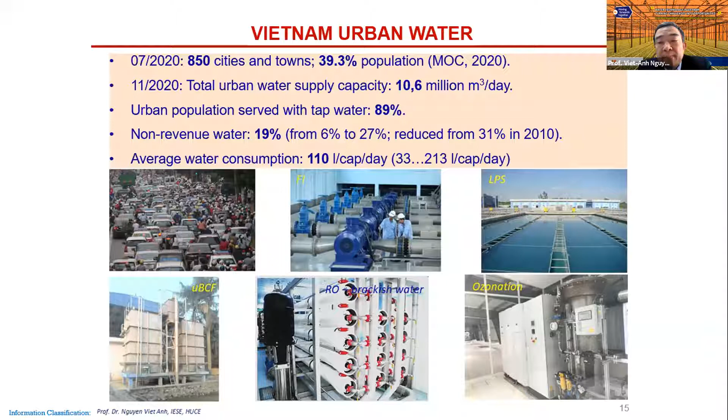Talking about wastewater in urban areas, so far we could treat only 15% of wastewater generated. But the number of wastewater treatment plants is still growing, and there are different technologies applied, including different types of activated sludge, oxidation ditch, SBR, trickling filter, and waste stabilization ponds.

Over the last 5 years, the investment for urban wastewater alone is already more than $1 billion US. So in coming years, we might need about 8 to 10 billion US dollars to treat all wastewater generated from urban areas, and we need from 3 to 6 billion US dollars to have 100% of urban water supply.

But please pay attention that the number of cities is growing, so we need more and more efforts, and not only from the state budget or loans. We encourage the private sector to take part, especially in water projects.

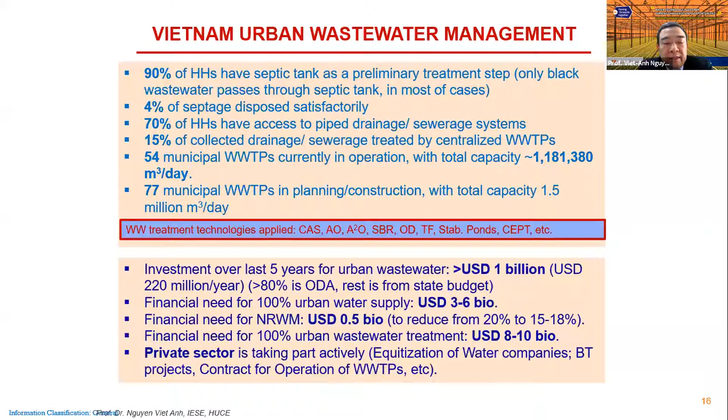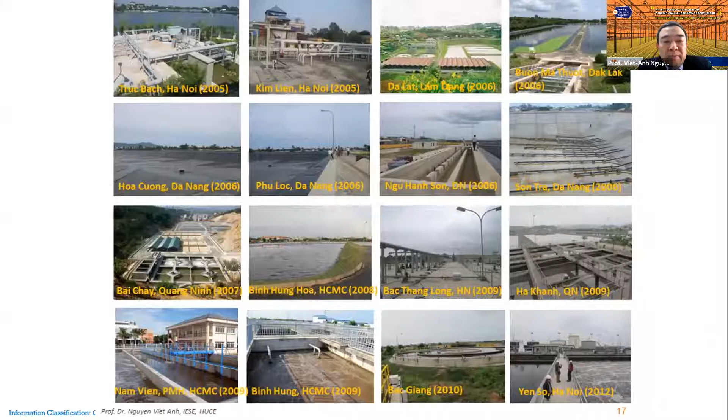This and the next slide, I just would like to show the in-operation water and wastewater treatment plants in urban areas with different technologies.

Now, about industrial wastewater management. We have more than 300 industrial parks, with an average occupation ratio of 73%. By law, all industrial parks should have centralized wastewater treatment plants, and so far 80% of these treatment plants meet the effluent standard.

The others are still under upgrading. They have to improve their technologies, even moving from class B to class A of the effluent standard. So we have a lot of room for business in providing technologies and equipment and so on.

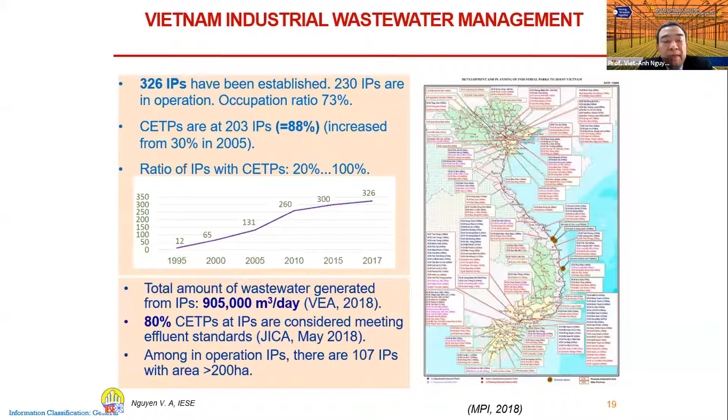So for each river basin, we start to develop the effluent standard accordingly. The government is now encouraging development of eco-industrial parks with industrial symbiosis. I know the Netherlands is very strong in this, so I hope we could find chances for cooperation. There's also a compulsory automatic monitoring station for the effluent of industrial and urban wastewater treatment plants with a capacity more than 1,000 cubic meters per day, which should transmit real-time effluent data to the authorities.

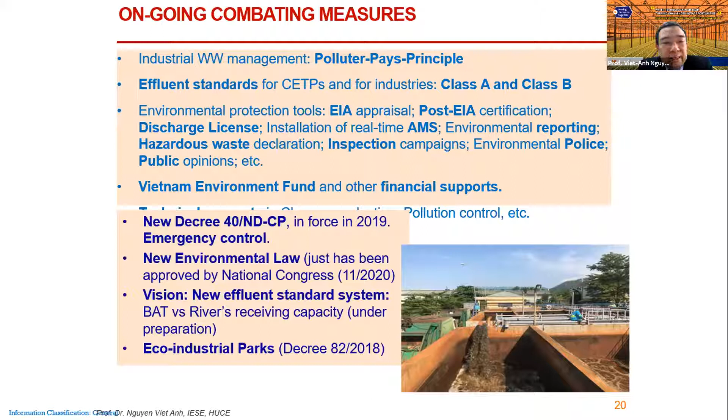So smart water solutions are now being highlighted in many water companies, and it will be a focus in the coming 5 to 10 years in the Vietnam water sector.

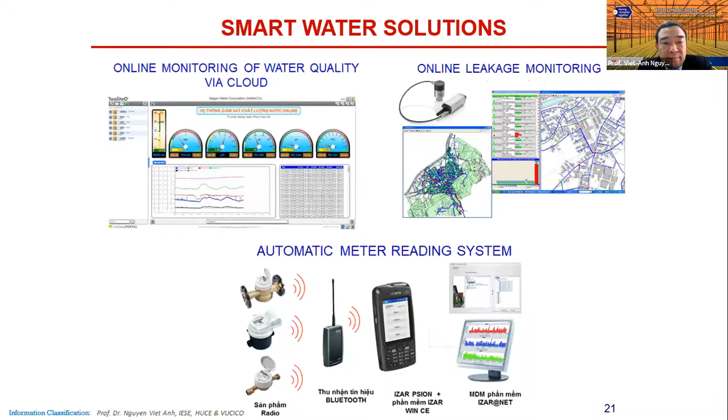Solutions for process control and optimization to save energy, to have less sludge produced, etc. And emergency control solutions—for example, we now have a new decree forcing blacklisted industries to have an effluent pond to make sure fish stay alive in the ponds before wastewater can be discharged to the receiving bodies.

And other options are also under development, so emergency control for wastewater and other pollution sources is a very interesting topic for cooperation.

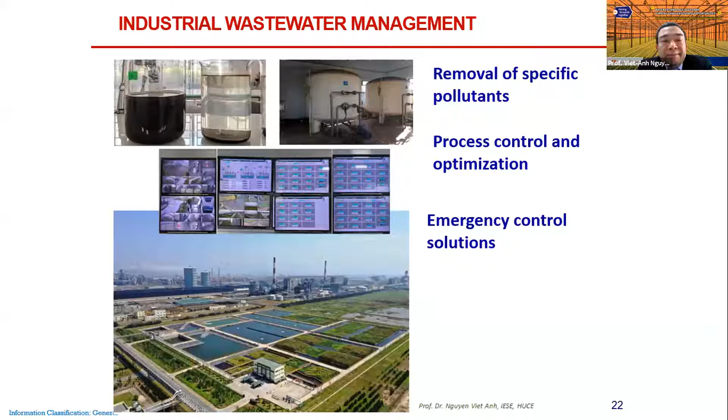But more than 20 cities in Vietnam already are developing smart city plans. So integrated waste management with resource recovery solutions is one of the important components of smart city development. These are some examples of our studies, and this is also a very interesting topic for Dutch companies to work in.

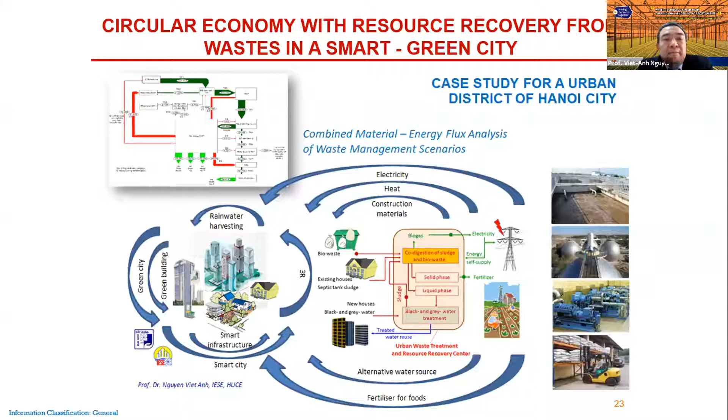So SUDS is one of the interesting topics. Next, please.

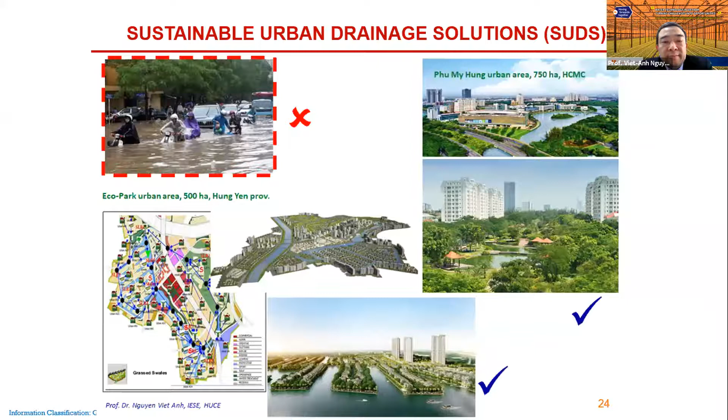Here I would like to highlight some opportunities for the water sector business. Private sector participation is encouraged; this is a policy of the government. So investors are welcome, and we have growing needs, increasing demand, and emerging challenges.

There are potential opportunities in the market: in water supply, solutions for non-revenue water management, smart water concepts and solutions, and specific technologies to remove specific organics, nitrogen, manganese, salt, and other substances. For wastewater, also specific technologies for specific pollutant removal with efficient performance, like energy and chemical saving, and footprint saving.

And we are starting to talk about resource recovery, especially from solid waste, sludge, and wastewater reuse. Industrial parks with eco solutions are also a good opportunity, and green and smart cities with concrete solutions like rainwater and flood prevention. Very important: smart technologies, with very high demand from planning through to the solutions.

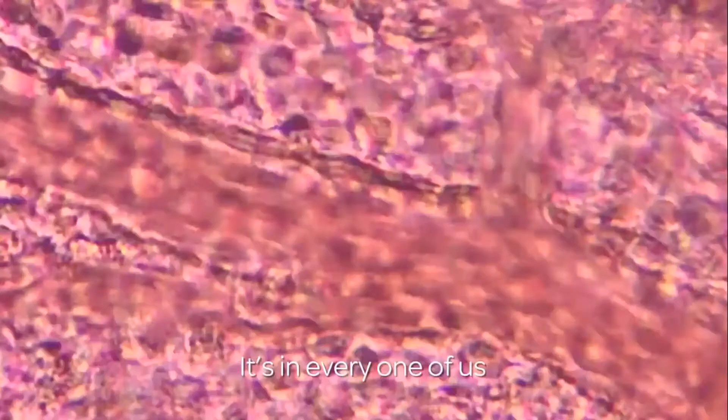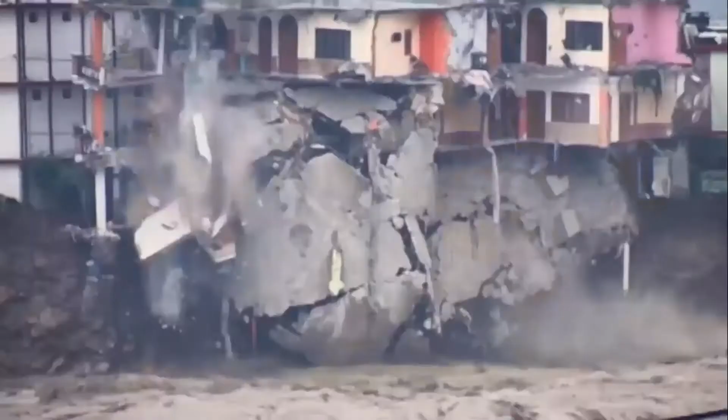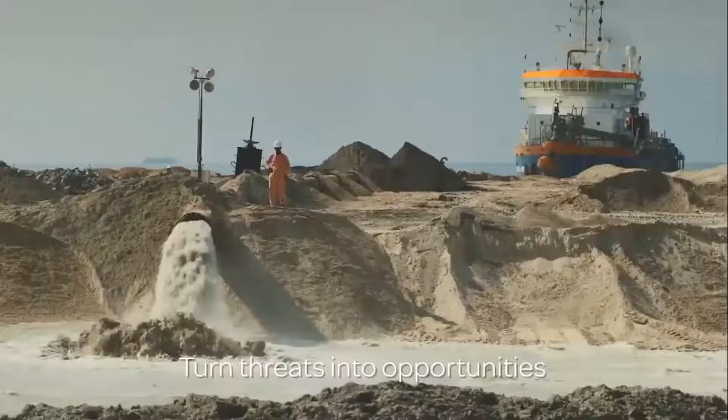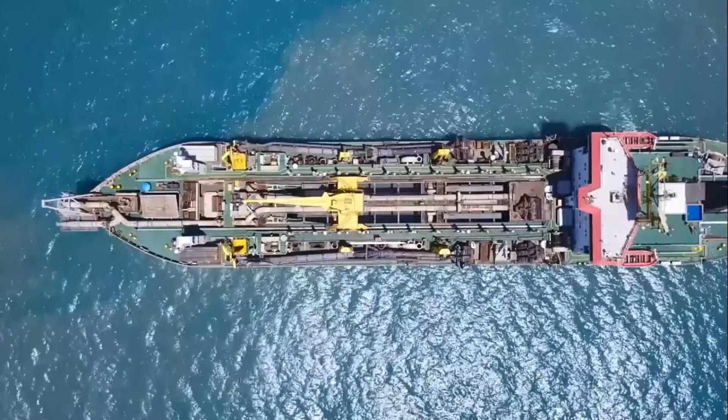Water. It's in every one of us, as a source of life, a connector of worlds. Water calls for a sustainable future, a delicate balance between humanity's progress and natural resources. We need to invest in transformative, integrated and inclusive solutions, turn threats into opportunities, translate research and market insights into breakthrough innovations, to build a prosperous future, to ensure there is a tomorrow for the planet, for its inhabitants, for present and future generations. We are the Netherlands Water Partnership, a network of Dutch water organisations working together on innovative and future-proof solutions for local, national and global water issues.

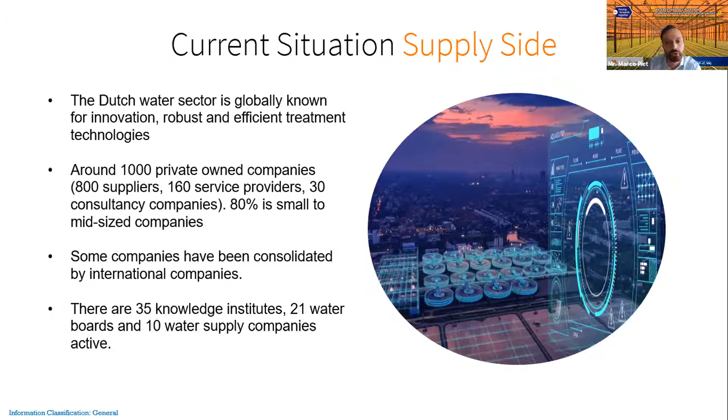The largest share of the companies are these 1,000 privately owned companies that are active, of which 80% are small to medium enterprises, basically up to 50 employees, and which are thus also the main target group of this study. Next slide.

The drinking water companies want to use the value in the source water and gain also energy and raw materials. This also to prepare for the energy transition and play into a more circular economy.

The wastewater sector in the Netherlands consists of several water boards, which are responsible for the cleaning of the municipal wastewater. The main focus of the wastewater field is the recovery and reuse of valuable components from the waste stream, higher effluent quality, less environmental impact, and reduced costs.

An increase of computerized control is used to increase the performance of wastewater treatment plants and reduce the labor that's needed for daily operations. So basically, we are looking at smart combinations, recovery of valuable materials and energy, smart water, membrane techniques, reducing footprint, land, chemicals, CO2, which also results in a lower TOTEX, total cost of ownership. Next slide.

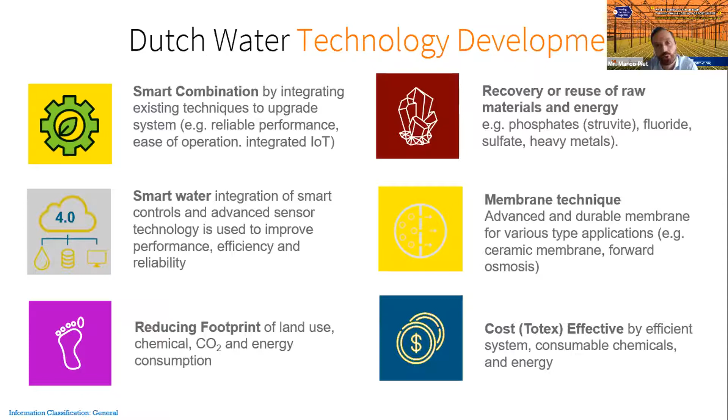So we compared the potential supply in the Netherlands, which of course provides a wide range of solutions offered by many small and medium enterprises, and the current demand of Vietnam.

And basically the demand as explained by the previous speaker, and as a result from our study. At the same time, we had to take into account the potential barriers, like different culture, the challenging business climate, also for instance, skepticism towards Dutch technology, whether it would work in the Vietnamese environment.

So this is an overview. In this overview, I will share the preliminary matches that we found for the different challenges. It's a bit a lot of text, small letters, but...

Per challenge, as you can see on the left, we categorized potential solutions into basically data collection and monitoring, analyzing data, and providing smart decision support systems, basically the software, and separate treatment solutions, the hardware. As many systems can be used in the water supply and wastewater sector, we did not make a separate classification for them here. Looking at the main challenges for Vietnam, and basically the challenges on the left are in random order and not by importance, we have put some examples for solutions in this overview.

Of course, there are a lot more solutions available, and a lot more will be included in the final report. The goal basically is to pinpoint: if you have a certain request or question or challenge, you can look at each of the sectors and find your brand name or solution.

As an example, for monitoring the water quality, predicting and controlling, the MPC buoy controls basically algae blooms in large lakes and reservoirs.

It monitors the water quality in real time and uses the data to predict and control algae blooms by making use of ultrasound to control the algae. As was mentioned, saline intrusion is becoming more and more a problem in Vietnam. Main solutions consist of membrane techniques, like Ceramac, which combines ceramic membrane units into one vessel, providing a more cost-effective and compact method to remove dissolved components from the water stream. Combined with SIX, which stands for suspended ion exchange process, designed to remove dissolved organic carbon from the water and help improve membrane filtration performance. It prevents membrane fouling. Another major challenge is the increase of pollution in the environment and water.

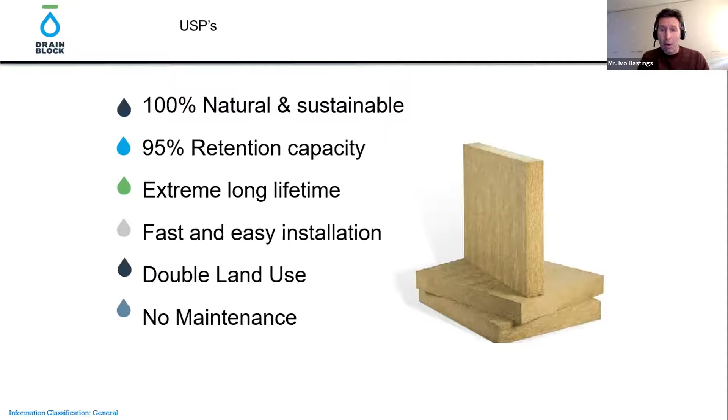Well, how about all the sediments, I hear you think? Yes, that's correct. Sediments are the enemy of the system. So before we take polluted waters to our reservoir, we will always first install a filtration step. Polluted water comes in, we filter out the sediments, and only the clean water will go to the reservoir.

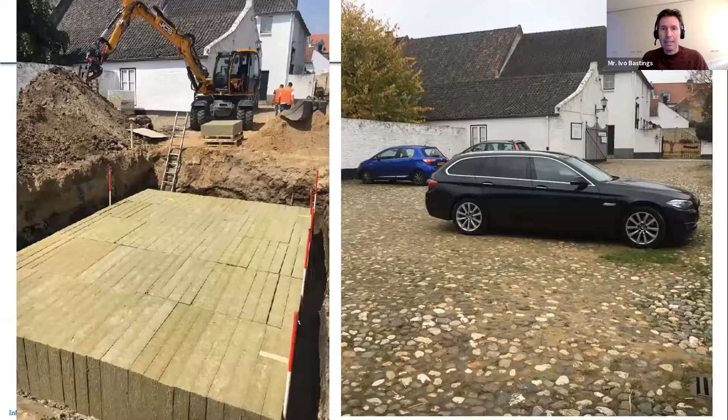This is a typical project, a typical situation in the Netherlands. What you see on the right picture is just a parking area. But the water from the roof and from the parking areas enters into the gutter, and underneath the parking area there is your reservoir, a drain block reservoir. From there, the water can only infiltrate into the soil. There's no more stormwater drainage system needed here.

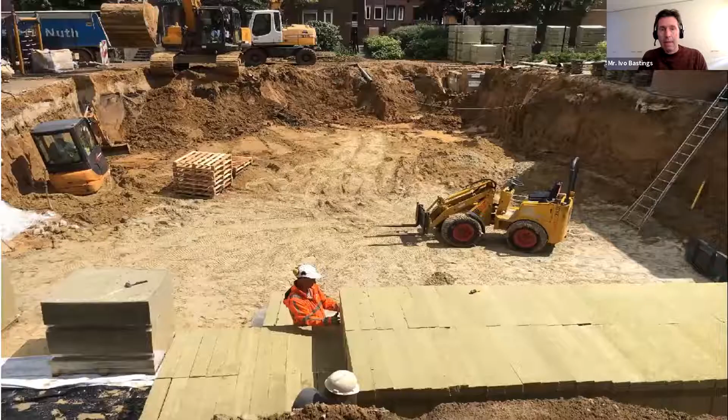This is a significantly bigger reservoir, almost 1,000 cube. But the client in that project did not allow for water infiltration. So on the bottom left, you see a black liner. This reservoir has been constructed with a complete liner surrounding it, and all the water is retained within the reservoir. That means the water in the reservoir is freely available for water reuse, watering your garden, or using for agriculture or any other purposes.

Well, this is a very interesting project. I show some of the great capabilities that DrainBlock provides. You see a slope road. Previously, when it started raining, all the water ran down to the lowest point on the road, and there was a flood. DrainBlock, however, has the ability to hold water against gravity.

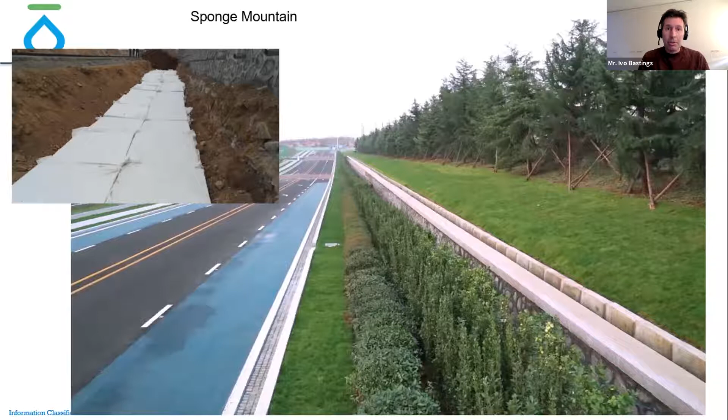So blocks have been installed alongside the road. Rainwater enters there, even on the slope. The blocks hold it and will infiltrate it immediately into the soil. So there's no more runoff to the lowest point, no more floods in this location. This was China, Qingdao.

That is even closer to your home. This is a project in Hainan Island, just off the coast from Hanoi. In this project, blocks have been installed underneath the green belt on the left and the right side of the road. Very often I hear people say, well come on Ivo, look at this, this is peanuts, this is too small. You know how much rain we have here in Asia? Yes, but the Chinese don't do it for nothing.

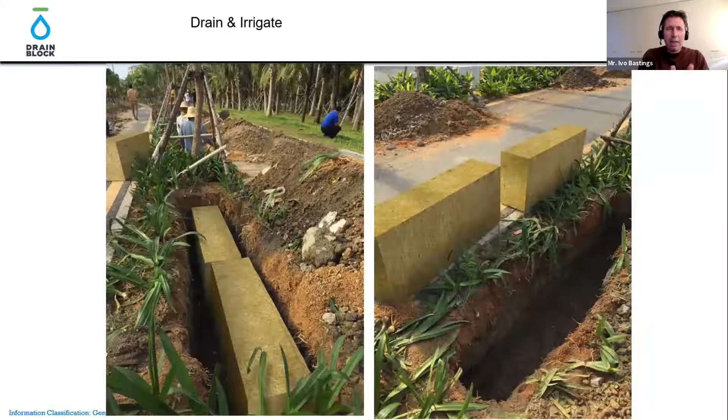I mean, if you do this - for kilometers on the left side and the right side of the road, you will also create a reservoir of thousands of cubes, but just in a very different shape. It's a very long, narrow reservoir. And the good thing about these reservoirs is that the water does not need a conveyance system to be transported from location A to location B. Water infiltrates right where it falls. You see the grate on the right top corner. Water infiltrates there and is readily available for the environment, for your plants, trees, and the rest will just infiltrate into the soil.

Well, this was my brief presentation. I hope you can see that we can provide a practical solution for almost every challenge that you have. If you have any other question that cannot be answered in the Q&A, please drop me an email or just pick up the phone. I'll send you my contacts later on.

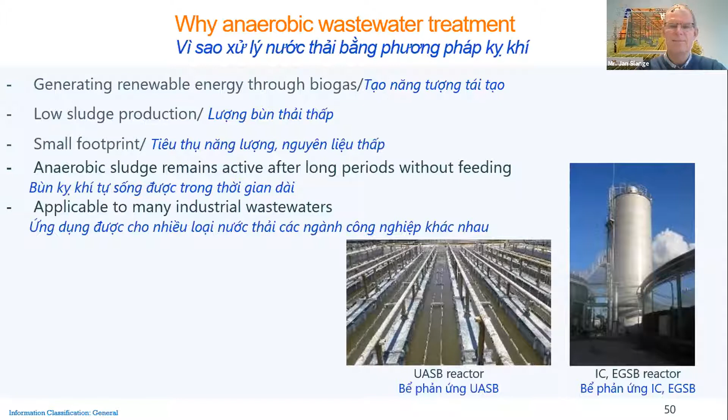But there are also challenges to operating anaerobic treatment - in any case you need an aerobic post-treatment, because anaerobic treatment does not remove nutrients and cannot meet class B or class A quality regarding COD and BOD.

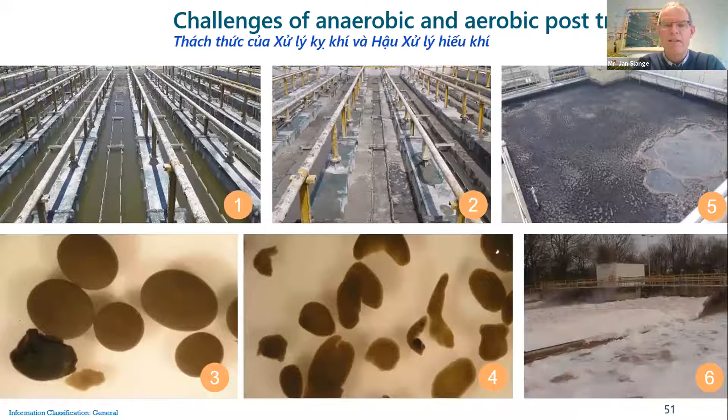What we see in practice is that more and more anaerobic treatment plants are applied. However, they don't always work according to design, or the operation is usually less efficient. In this case, we show two examples where the design was 75% COD removal, but in practice they only reached 65% removal.

But also important is the load to the aerobic post-treatment - at only 65% it's 2.3 times higher. That means you need a much bigger, 2 to 3 times bigger, aerobic treatment, and you produce more sludge.

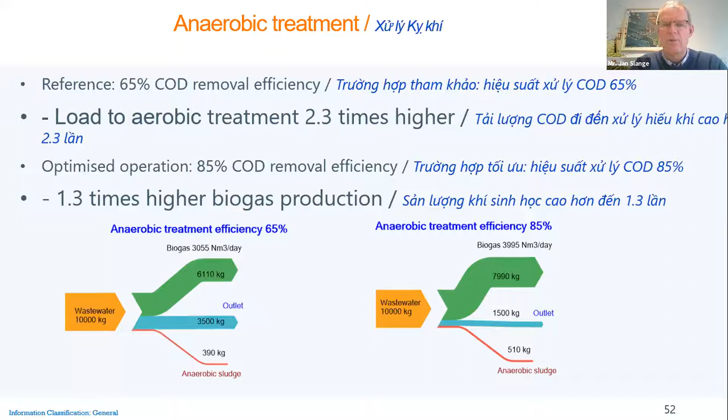The 2.6 times lower energy consumption pays back in energy cost, and aerobic sludge disposal will also become more and more expensive. Currently, in many Asian countries, sludge can be disposed of in landfills, but in the near future you will need dewatering, drying, and probably even incineration, which increases the costs.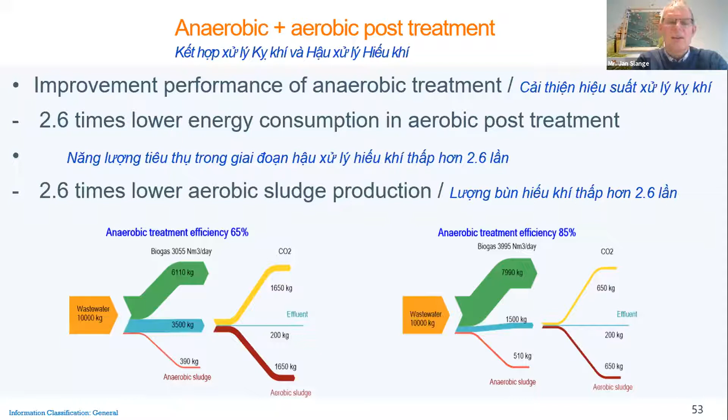To give you an overview of the cost comparison for these two examples, you will see it in the next slide.

So this is a summary of the normal operating and optimized anaerobic and aerobic treatment plant. You see the difference in biogas production, the benefits for the biogas in the boiler in euro per year. Also, the electricity production is much higher, and the electricity consumption in the aerobic treatment is, of course, 2.6 times lower. And the general benefit.

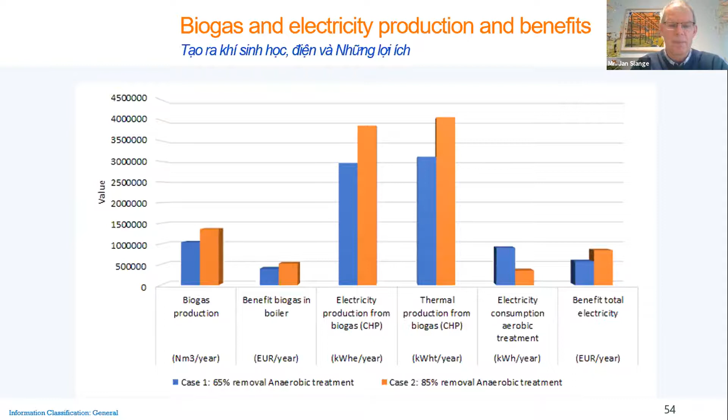This is for a treatment plant with a capacity of about 2,000 cubic meters with 5,000 milligrams COD, but it can be made for every other treatment plant. The result is that this achieves a better effluent quality, more compatible for reuse with additional treatment. Thank you for your attention.

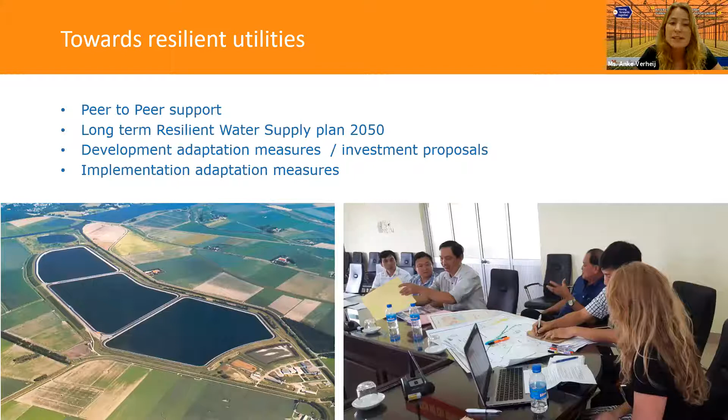To start, it's needed to do a water supply and demand analysis to look into climate change and human impact on the Delta. The previous speakers already explained a little bit about this. The main challenges of the water supply companies are salinity intrusion, pollution, and also shifting from groundwater to surface water use, because the use of groundwater is causing land subsidence.

So then, based on that, we had several workshops where we looked at the current water supply system. We had brainstorms about different possible adaptation measures that would be feasible for the partner water supply companies, looking at the future water demand, and the water quality of both ground and surface water.

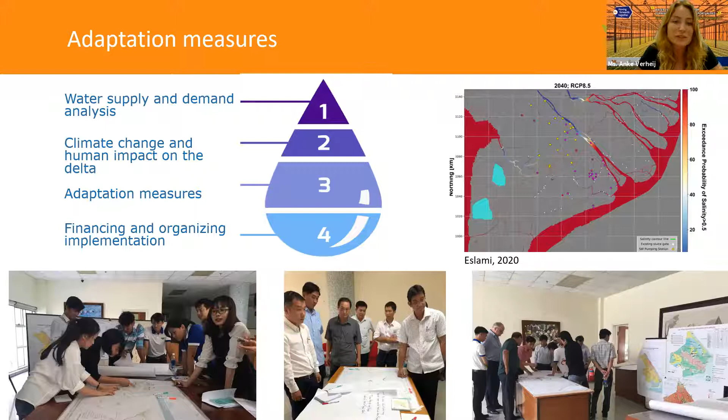So then, what are the different options? Well, this is general for partners, but per water supply company, we're looking into specific measures to take.

So an option is to change the source from groundwater to surface water, with advanced treatment such as reverse osmosis. As you can see here, this treatment technology was installed in our previous project with Soc Trang WASCO, this desalination plant.

Another option is to add storage. Currently, reservoirs for drinking water supply are being developed in the Delta on a small scale, but managed aquifer recharge is also a possibility. Another option is to get water from elsewhere, more upstream, in another province. For these different adaptation measures, it's important to take into account the technical solutions, but also financial, institutional, social, and environmental criteria. As water supply companies ourselves, we can help our peers in the Mekong Delta with selecting the best possible solution for them.

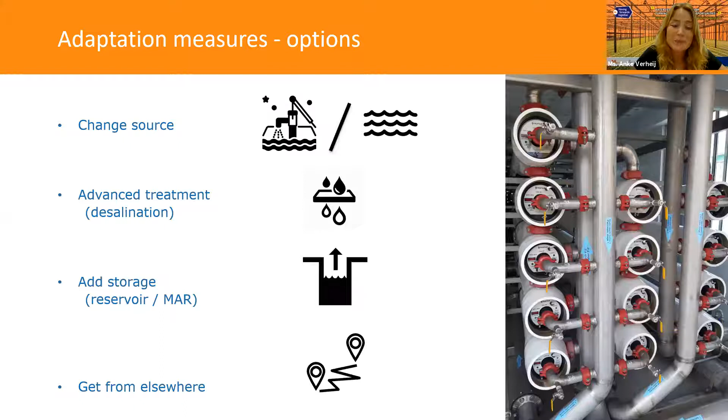If there are any questions, please ask them in the chat. To go more into detail, I kept the presentation quite general in these 5 minutes, but if you'd like more information, please let me know. Thank you.

Thank you, Anke, for your explanation. Now I would like to invite our last speaker of this session on Dutch technology supply. Our speaker is Erik Roesink from NX Filtration. Membrane technology is an important field of innovation, already mentioned by Professor Viet An. Please, Erik, explain what your company can contribute to addressing the challenges in Vietnam.

Thank you, Lauren, for this nice introduction. My name is Erik Roesink. I'm a professor at the University of Twente, and also 6 days a week an entrepreneur, and started a new company called NX Filtration. It's about hollow fiber membranes, a very innovative, efficient technology also to be used in Vietnam.

Next slide, please. You heard already that Marco Piet told you about X-Flow, Pentair, Norit. I was one of the founders of X-Flow in the mid-80s. The company was finally sold to Pentair, and then I left and started a new company called NX Filtration. This company is focused completely on hollow fiber membranes, specifically in the form of a nanofiltration membrane, designed to remove micropollutants, all the nasty compounds found in waters all over the world, also in your country.

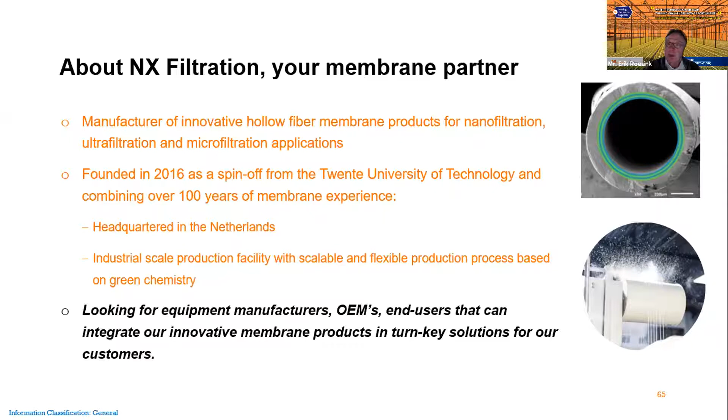Just to be sure upfront, this is a very innovative technology which could make, in one simple membrane step, drinkable water from the Mekong or from wastewater. Since we are only making membrane modules, we are looking for equipment manufacturers, partners, installation specialists, and end users to become very active and successful in Vietnam.

Next slide, please. You see here our 3 key markets for our product, which is typically to make drinking water from surface water, for example your Mekong River and all kinds of rivers. We're very active in all kinds of industrial wastewater programs, also reuse, and an important market for us is the reuse of municipal effluent, which is also relevant in your country, as I saw in the first presentation. You have a lot of municipal biological treatment systems, and the effluent there can be perfectly reused for all kinds of applications.

That's an application we are working on very hard also in Europe with Witteveen+Bos, which you heard in the former presentation, or with Haskoning, but unfortunately they forgot to mention that hollow fiber nanofiltration is also a very efficient way to remove micropollutants from wastewater. Next slide, please.

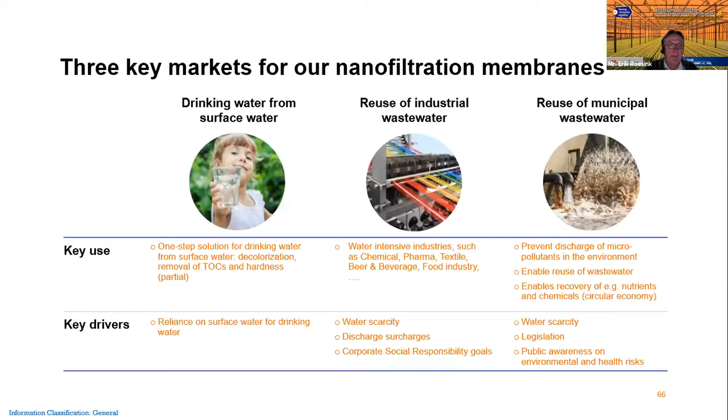So in fact, nanofiltration, hollow fiber nanofiltration, is a perfect one-step treatment. That means we have only a very minor, simple pre-treatment, and we can produce drinkable water quality in one step. Certainly when dealing with surface water with very low salinity, this is still possible. We are not desalination, but we do need fresh water, and then we can do the job in one step.

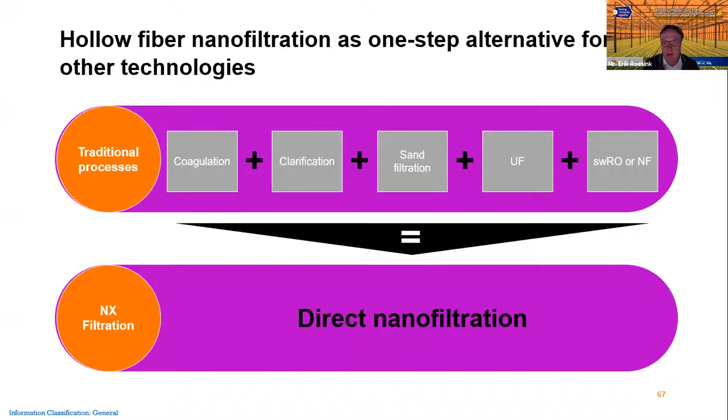That means, in the next slide, you see we do have quite a bit of advantages over, for example, reverse osmosis, which is relatively expensive to operate because of the high pressure you need. Nanofiltration is much more open, so we allow minerals to pass, which is favorable for making drinking water. That means our energy consumption is relatively low, around 0.3 kilowatt hour per cubic meter. Combined with the very low use of chemicals, so no waste, we have a very low CO2 footprint, and the operational cost will be around 0.2 euro per cubic meter, depending a little on the size of the treatment.

Our membranes are what we could call low fouling. You heard already some about fouling in the Haskoning presentation. And if you have fouling, which you always have finally in some way at some moment, you can really clean our membranes with very oxidative, harsh chemicals like chlorine. So I think this is a very important new technology, enabling a lot of new opportunities in dealing with surface water, wastewater, and also groundwater.

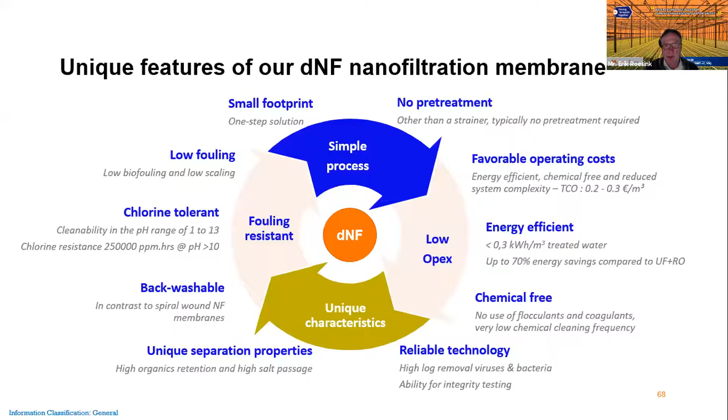This is some examples. By the way, you see myself here at the small picture on the right side, but also interesting to mention, the ambassador of Vietnam in the Netherlands visited our company in September this year, and I think we made him very enthusiastic about our treatment, and he also pointed out a very interesting application in your area.

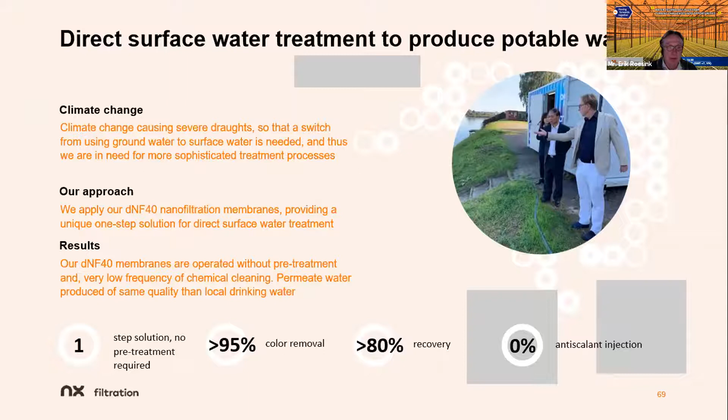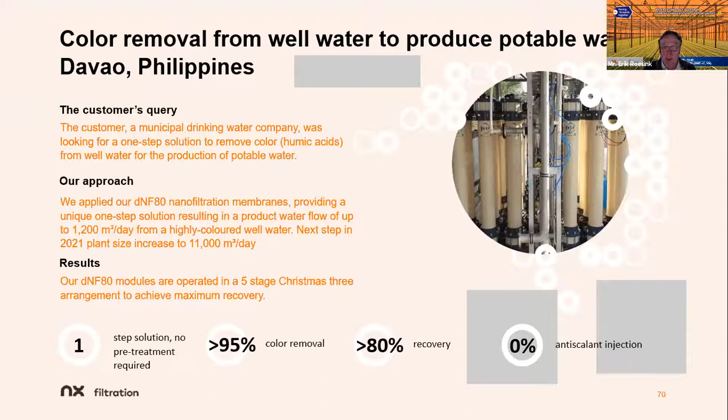This is an example of what we already realized on large scale in the Philippines. There is a lot of surface water, colored, partly polluted. This is well water, and here you see our system in operation. As I repeat, we are supplying you the modules which you see in the picture, but we do need partners who can build this type of system in your country. And then we can also use the help of Witteveen & Bos and Haskoning, of course, and other consultant companies.

As I mentioned, we are active in treating municipal wastewater in Europe. Worldwide we see a lot of micropollutants, pesticides, nanoplastics, insecticides popping up in wastewater, which are not treated well enough by biological treatment. So there's a very good chance to integrate - I would not call it end of pipe, but to integrate hollow fiber nanofiltration in the process and create a perfect water for high quality use, even for drinking water.

We have demonstrated that with our nanofiltration, we can do it in a very simple membrane step, with minor pre-treatment. We take the effluent direct onto the membranes, and then we have a very high retention. We can even play with the membrane type. We can typically go higher than 80. Even if we take a more dense membrane, we can go higher than 90 if required.

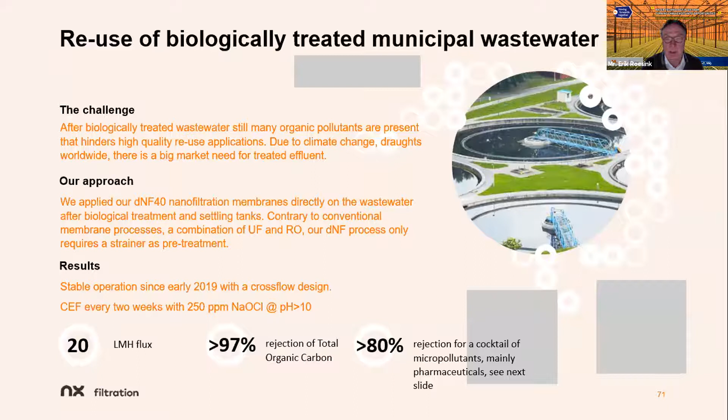Here you see I'm discussing with your ambassador, and the next picture would be that we drink together a glass of water. We are already quite active in Vietnam as a startup company, a spin-off company in the Netherlands, though we already have over 50 people, 2 locations in the Netherlands, so we're not that small anymore. Via Saxion, which is a local university, we already put a MexPlorer, which is a small test unit, in one of your universities, but we're happy to open cooperation with more universities. One OEM, an installation company called Pernam, is already in good contact. And as I told you, your ambassador is already very enthusiastic about using our technology. As I told you, we're very happy and open to pick up all kinds of cooperation to show our capabilities in treating surface water and other waters in Vietnam.

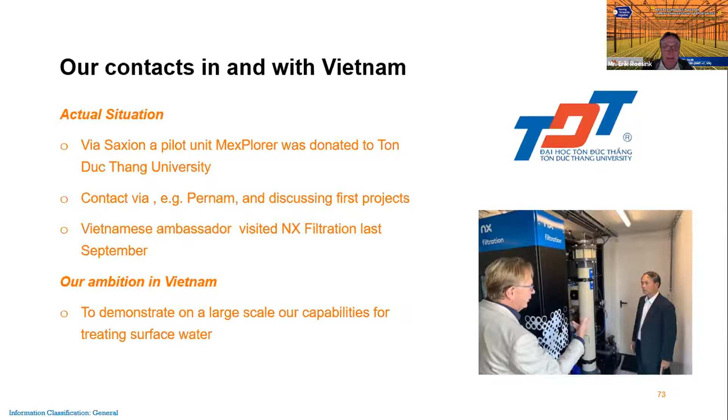So that means we have already done the first steps in Vietnam, and we see huge possibilities, but we need partners to help us. We cannot do it alone. Nobody can do it alone. You need cooperation. Thank you for your attention.